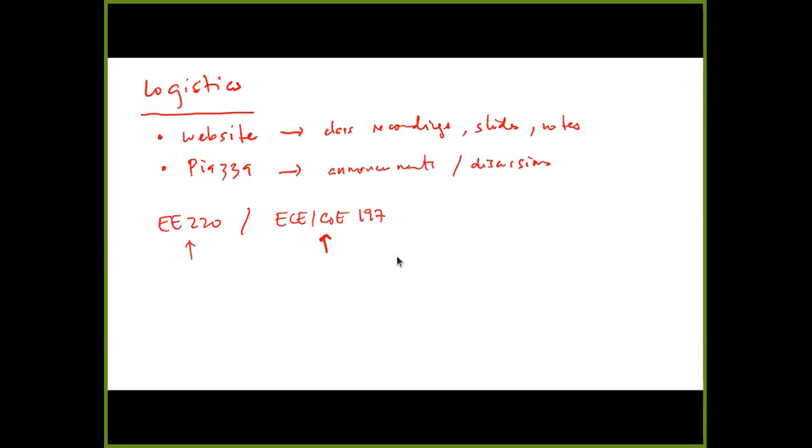So this is cross-listed as EE220, and for UP students, ECE COE 197, right? So that means grad students are taking EE220 while undergrads are taking the 197. The lectures are pretty much going to be the same, but for grad students, you get additional work, right? So for those enrolled in the grad course, you get additional work, a bit more, not really that much, but you do get some more requirements than the undergrads.

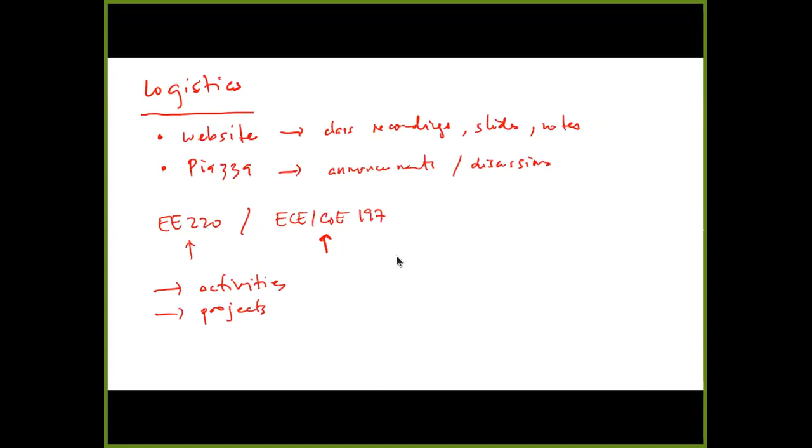And so in this particular case, grading for UP students will be, we're going to have the activities, and then our projects. But again, the undergrads and grads will have slightly different requirements. Okay? So I sort of was referring to UP because this is again part of the CIDR, the Center for Integrated Circuits and Devices Research.

And one of the components of this is a DOST funded project. And one of the components of CIDR is to try to promote IC design, right? To schools, companies, and so on. So this class is actually a first because we have not only people from UP, but from various universities, companies, and some government institutions, right?

So right now we have 68 attendees, I think. So we have space for more, right? So the limit for this particular Zoom thing is something like 500. So if you know someone or a classmate was not able to attend now, they definitely are welcome to attend in the future. Okay, so again, as you probably saw, registering to the Zoom links.

So the Zoom lectures are going to be 7 to 8:30 a.m. Mondays and Tuesdays. But you have to register so that we sort of can keep track of all of these things. We have to report to the DOST at some point. But it's also good record keeping. So if you have not, I guess you're here, so you've registered. But if you have classmates or someone else that want to attend, they have to register first. You have to just register once to get that link, and then that's good for the whole semester.

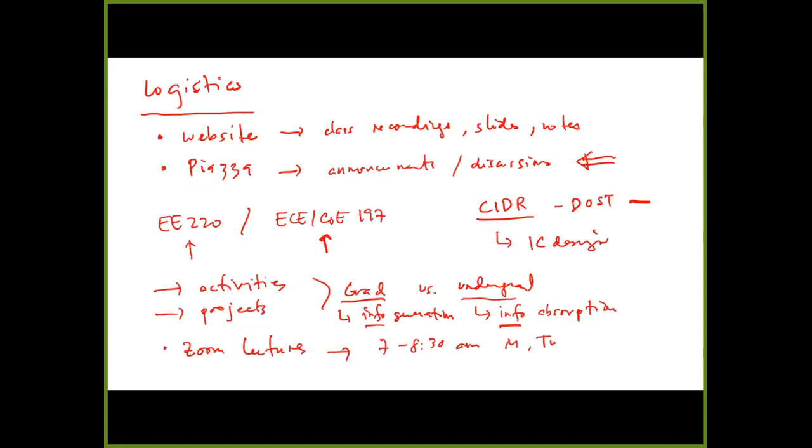Okay. So first of all, what I want to talk about, this is EE220, and the title is Analog Integrated Circuits. Right. So let's just try and figure out the scope of this. So first of all, let's try to define what analog is. A lot of times, or at least for the purposes of this class, when we say analog, we mean continuous quantities in either voltage, current, charge, flux, and so on and so forth. Right? And analog is actually divided into, so hopefully we understand, right?

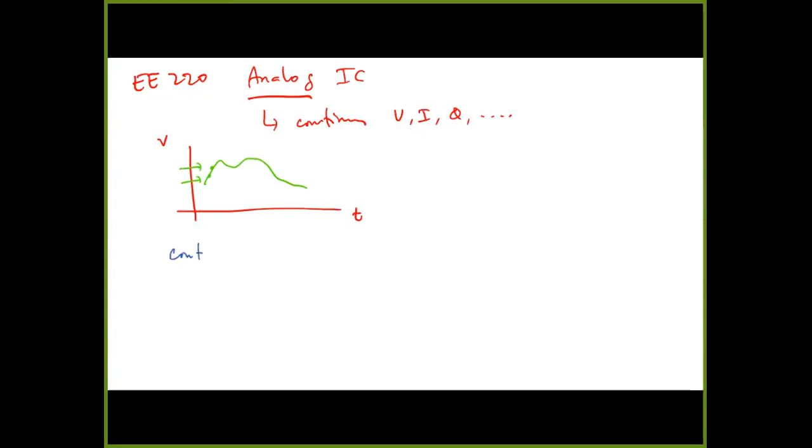So that means if you have over time some voltage or current or some waveform, this thing is continuous, right? It exists for every point in voltage. Right? But it turns out that that is true for two additional classes, right? One, we have what we call continuous time. That means the voltage is defined at all points in time. So this is continuous and this is continuous. That's what we mean by analog continuous time.

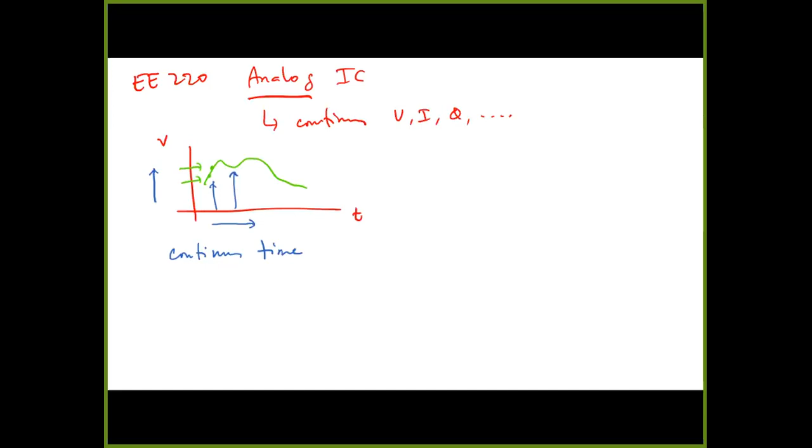But in this class, we will also look at discrete time. That means it's still going to be continuous in voltage, current, charge, and whatever, but it's going to be only valid at certain points in time, right? So maybe it's only valid at this point, this point, and this point. So you have, let's say T1, T2, T3, right? So that's still considered analog, and it turns out we like that particular regime because it allows us a lot of optimizations, especially if your analog system eventually goes to an A to D and you convert it to digital, right?

So just to illustrate that, if you have your analog input, let's say your analog signal, most of the stuff that we'll talk about will be analog processing, right? The simplest analog processing that you can look at is an amplifier. But you can think of other analog processing. You can filter, you can mix, you can up convert, down convert, you can multiply, and so on. Or you can change the frequency response. You can shift frequencies from one to the other. So it is in continuous time.

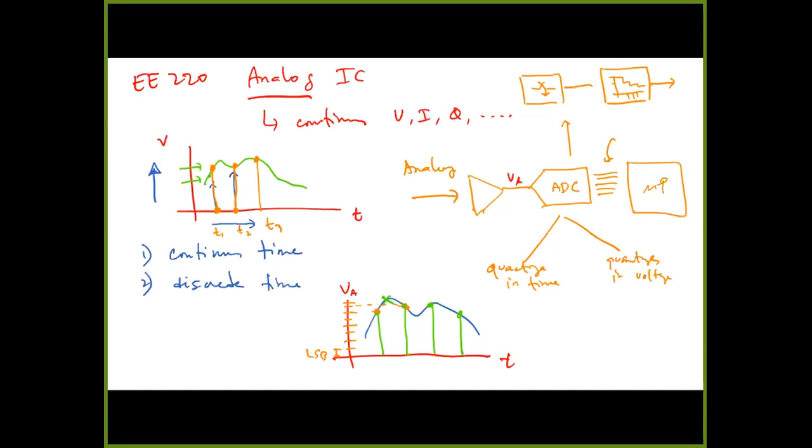But it turns out these two components can actually be separated. That means I can think of this ADC as just a switch that samples in time, and a quantizer, something that, for every input, gives only certain levels at the output. So in this setup, this is continuous time analog, this is discrete time analog, and this is going to be digital.

So when we talk about quote unquote analog versus digital, the boundary is sort of somewhere here. And by thinking of it this way, we actually have a lot of opportunities to optimize. For example, if I have an amplifier or a filter up here, and I know my ADC will just throw away this part of the waveform, I'd rather not spend power or effort trying to amplify or filter that.

So what people do is, instead of putting the processing here, you put the processing after the sampling, let's say the amplifier, and you come up with discrete time analog circuits. One very common class of discrete time analog circuits are switched capacitor circuits, which we'll also look at, because they offer a lot of opportunities to save on energy and power. So when we talk about analog, we're talking about these two things: continuous time and discrete time.

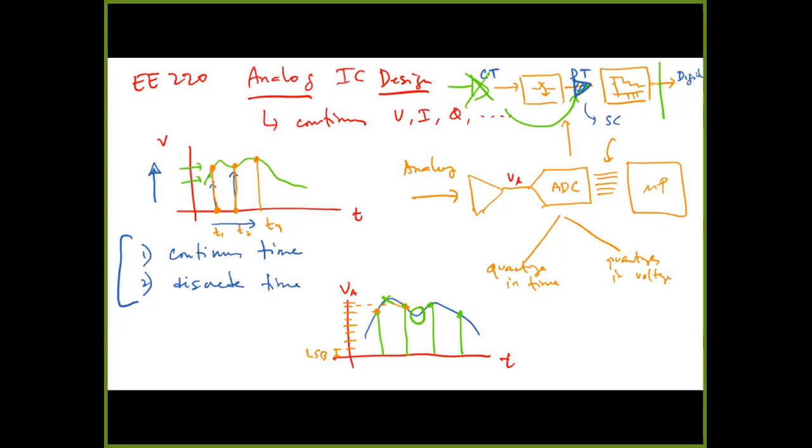Okay. Now, one of the things that we want to also understand about 220 is, of course, this is analog IC design. So let's talk about that for a bit. Am I running out of slides? Yes. So when we say design, let's talk about this.

So what is design? Well, for us in analog, design is a process where we start with specifications. Then from there, we figure out our circuit topology, everything about the circuit. And then maybe you do layout, and then you implement that particular circuit.

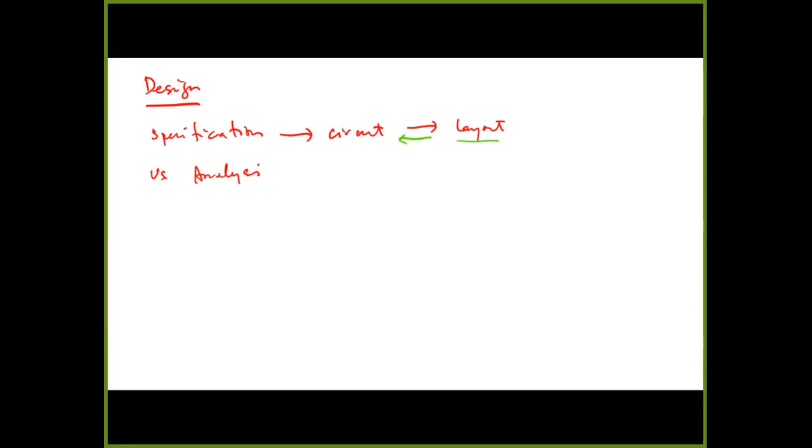Just to distinguish it from analysis: analysis is exactly the opposite. When you do analysis, most of the time I start with layout and I try to figure out what that circuit does and the performance of the circuit. In most undergrad classes, you start out with the analysis part. You're given a circuit and you try to figure out how it works.

But in design, it's totally different. I need something that works like this. What's the best possible circuit that we can have? And one thing that we want to understand here is when we design, the specifications normally would give you functionality.

Okay? But in real world applications, functionality or basic or fundamental functionality is the easiest thing to achieve because you have a bunch of other metrics that you need to meet, and we'll talk about that when we get to our design. But just to illustrate, okay, maybe it has to work over a wider temperature range, or the noise should be less than a certain amount, or the offset should be within a certain range, or the power is below a certain limit, right?

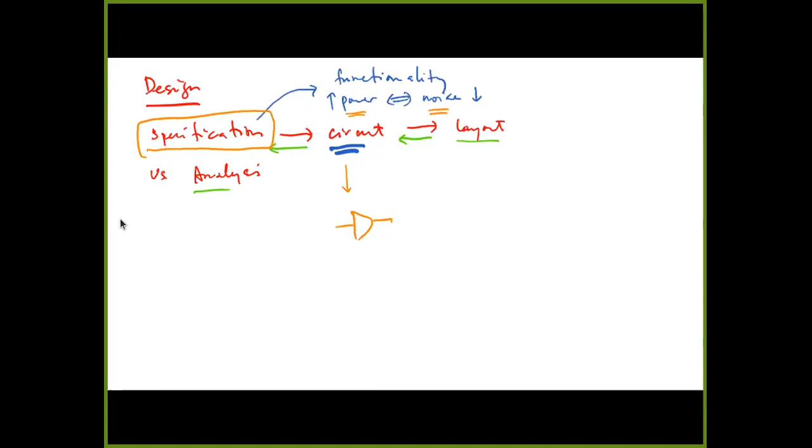Oh, what is that? So there's something blocking the screen. Let's see if I can. How do I do it? Does that work? Oh, okay. How is that? Hopefully, got it now. Oh, it's still there. Let's see. Now, okay, good. So it turns out that if you have a bunch of windows open, even if your shared screen is in front, screens at the back can actually block the view.

Okay, good. Thanks. So we're talking about all these specs, and in some cases the technology and the application can make it easier to meet certain specs than others. And when we say easy, that means the cost is going to be lower. And when we talk about costs, it's not monetary cost most of the time. We'll see that we have different currencies in our design, and the most common currency in analog design is gain, right?

So if I have an amplifier with a lot of gain, I can use some of that gain to buy something else, right? So I can use gain to, let's say, buy bandwidth. I can use gain to buy better input and output impedances. I can use gain to get lower noise. When I say buy, that means if I reduce gain, or trade off gain, I can increase bandwidth, I can improve impedances, I can improve noise, and so on and so forth.

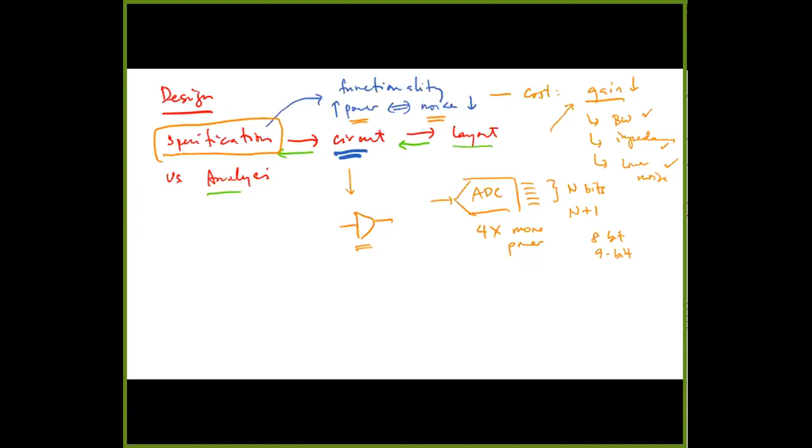Right? So a lot of times you get ad hoc type design methodologies, but that does not scale, especially when your circuits become very complex, and you get multiple specifications or metrics trading off, right? So we made an example of power and noise, but it's actually a more complex trade-off scheme, right? Power, noise, bandwidth, gain, and so on and so forth, linearity.

So you want a systematic approach, but you want it to be based on fundamental principles. So fundamental, easy to verify principles, right? And by doing that, we can create approaches or methodologies for not only one specific thing, but for a wide variety of applications.

Okay, so again, let me know. My handwriting is definitely very bad. So let me know if there's something you cannot understand on that screen. Right?

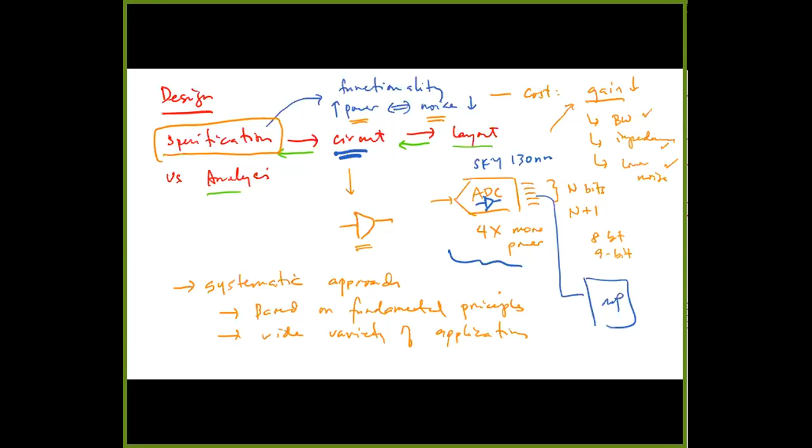Right? In digital, it's very straightforward, right? So if I build gates, I build a microprocessor and stuff like that, I have something like 1 million gates. So how much is the cost of a gate? Or that translates to, what's the cost of a transistor? And the reason why we started to move a lot more things into digital is the cost per transistor is going down exponentially.

Okay? Now, this is, if I'm not mistaken, a 2006 figure from Intel that is very optimistic. They were somewhere around the 22 nanometer type thing, or 30, when they drew up this slide, and said, yeah, this looks pretty neat. So what does this mean? If you do the slope here, cost per function decreases 29% per year. Cost per function is a metric the digital people use. It goes down around 29% per year.

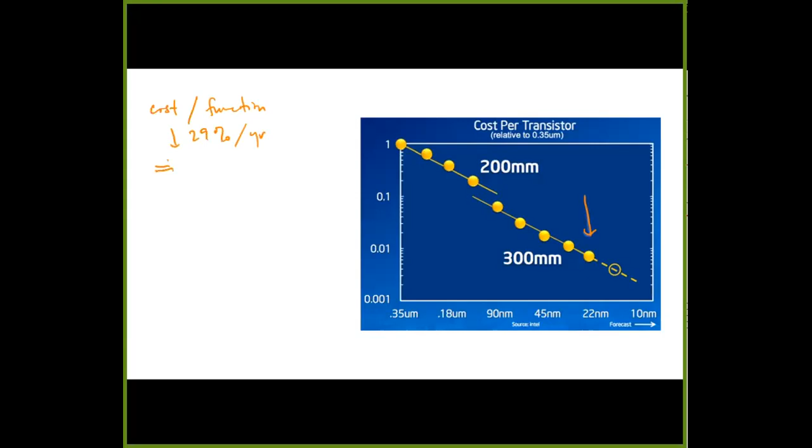So people have already done these numbers. The implication here is the cost goes down by 30x in 10 years. Whatever I'm paying now in terms of fabrication and so on, in 10 years it goes down 30x. So this is also one reason why we try to avoid competing in cost. Why? Because Intel, if they do nothing but just scale, if they have one circuit design from something like 2000 and do nothing except build new fabs that can manufacture those designs, their cost is going to go down 30x in 10 years.

So if you want to compete with them, your circuits have to be better. In terms of cost, your projection should be better than 30x in 10 years, something like 100x or 300x reduction, because they will get 30x doing nothing in terms of circuit design. And if they add circuit design, they can get something like 100x or more reduction in 10 years. So it's cost per function. You're paying the same amount for a processor, but you have more functions in your processor; they can pack in a lot more functions.

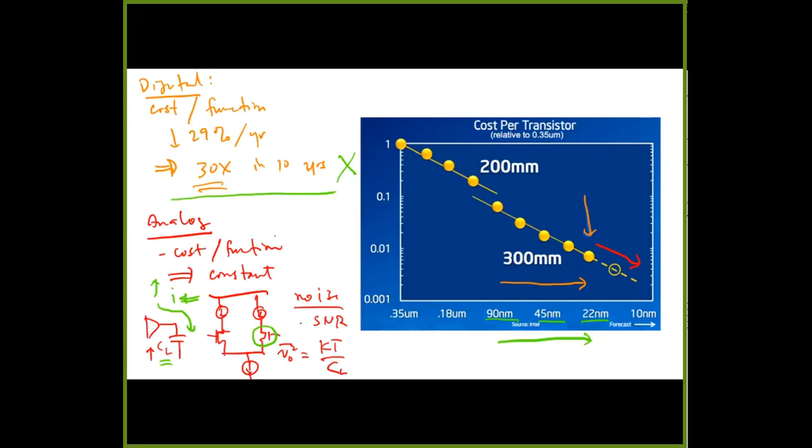When you go from 90 to 45 to 22, your clean rooms have to be better, your lithography has to be better, and so on. But that's factored in these curves. So what changed when we started going below 28 nanometers? Let's see how we normally progress and how people think about transistors, in our normal planar device.

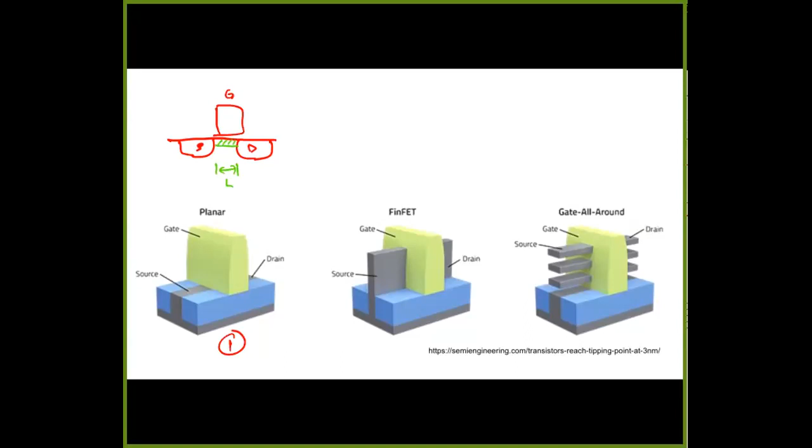So we have our planar device, figure 1. If I look at the cross section, you get that very familiar source, drain, and gate. The gate produces an electric field that generates a channel there. One interesting thing is that the current depends on the transistor length. The smaller the length, the larger your on current, which is good, because to get speed with a very large CL, since you want low noise, I need a lot of current.

So I get faster and faster devices, right? But that's good because when you start reducing the length, the current starts going up. Okay. Now, the problem is when that length becomes very small, it becomes harder and harder to turn the transistor off. So that means even if I turn the transistor off, just because the source and drain are very close together, current can still flow, right?

And you have a bunch of mechanisms there. One is leakage current, another is what we call sub-channel conduction. Ideally, you want all the current to flow next to that surface, but because they're so close together, you get conduction below that channel, right? So you can get leakage through there, or you can have breakdown. Just because these things are very, very small, something on the order of sub 10 nanometers, right?

So the issue here is, I can actually make that current very large, but I lose control of the current, right? Because I can try to turn off the gate or change the gate voltage, but it's not affecting the current that much anymore. So how do you move forward? Well, there's a bunch of ways, and one of the more common, for 28, 22 nanometer type devices, are what we call FinFETs.

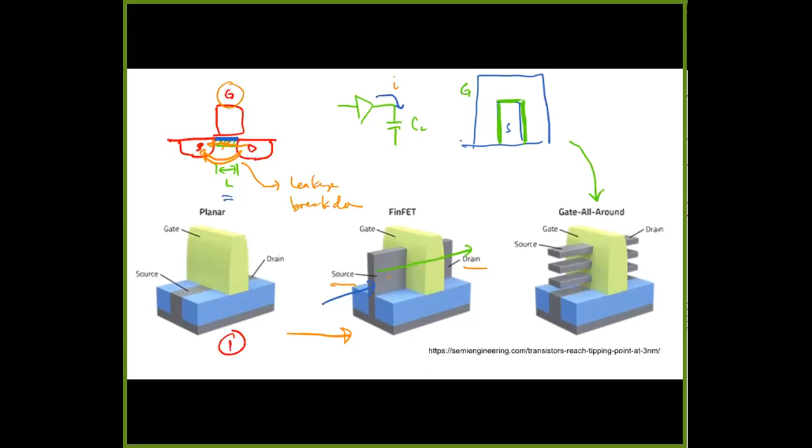So what does that mean? The gate controls three sides of that source, right? So it allows me to control the current coming in way better. And obviously the trend now, people are really excited about: if I can do that FinFET, I can extend that to what we call gate all around.

So now looking at the source in this direction, I have the source and the gate going all around, so the gate actually controls four sides of that source, right? So it controls the whole channel. Over here it's controlling this, this, and this. So you actually have less chance of leakage and breakdown. I can start increasing the current, but at the same time maintain control of the current.

And obviously, if I can do that for three sides, I can do that for four sides. I can control all that channel region over there. So it allows me to again do scaling, increase that current while reducing this leakage. This is something called the I-on to I-off ratio. This is a metric for how they design transistors. I want to be able to have a lot of current, but I also want to be able to turn it off.

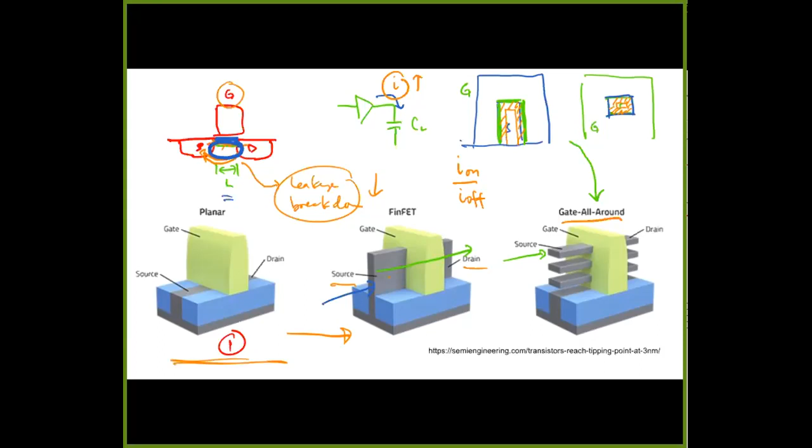And it turns out that our planar traditional transistors have very bad I-on to I-off ratios. When you get to 28 nanometers, Intel has a nice 22 nanometer FinFET, TSMC also has a nice 28 nanometer FinFET, and you get significantly better at this. But notice that, yes, I can design smaller and smaller transistors. Samsung said this: we can design 3-4 nanometer transistors, but we cannot make them as cheap as something larger than 28 nanometers, because the lithography and manufacturing you need to build this is way different.

So this is something we want to understand. And having understood how this works, we want an analog design methodology that can scale, right? What we want now is something we can use to design analog circuits in planar, in FinFETs, or later on in gate-all-around. So the methodologies that we look at are going to be still applicable.

That's what we want. We want to have them applicable to all of these, so we're prepared when we start changing technologies, right? So the good news is that what we want to do in this class is going to be agnostic of technology. In any of these things, we look at fundamentals and design with that in mind.

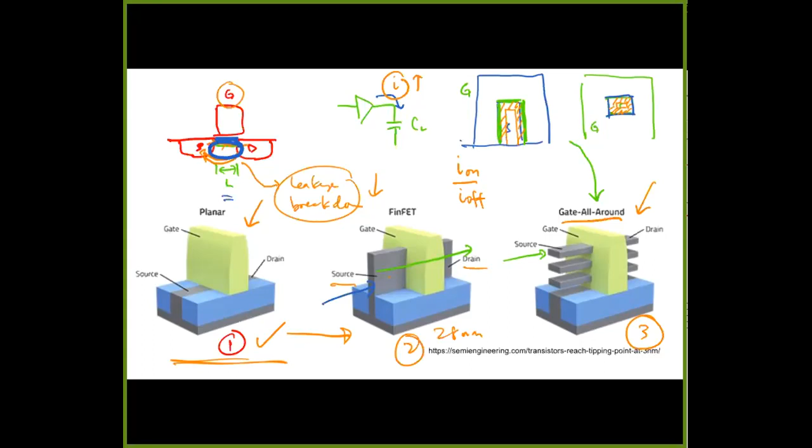One other limitation on why analog circuits cannot scale as much as digital is, again, it has to do with signal to noise ratio and how digital scales. So a lot of these fabrication facilities, a lot of the fabs, are optimized for digital. Okay? So what does that mean? When you're optimized for digital, I want to be able to optimize inverters, right?

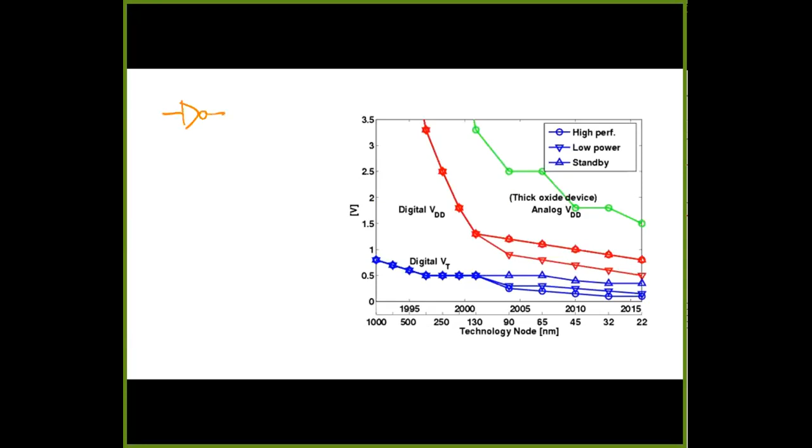So when you're a digital designer, I think for the most part you can reduce everything to the performance of an inverter, right? And one of the things that we sort of notice is that the power is proportional to the load capacitance times supply voltage squared, right? So if you want to reduce the energy, or power, you definitely want to reduce VDD times switching frequency.

So the good news about digital is that the noise margins are very large, right? It's a 0 or 1, or 0 or VDD, such that there's a very large margin there. So for digital, I can just go on and reduce supply voltage because I only am representing 1 bit, right? So that's the trend you see here.

Supply voltages went down drastically from the 1990s to just short of that 90 nanometer node. And one of the reasons why is I really want to reduce power. Why is that? Because the main limitation for all our digital stuff is power. Our processors running at a few gigahertz consume a lot of power.

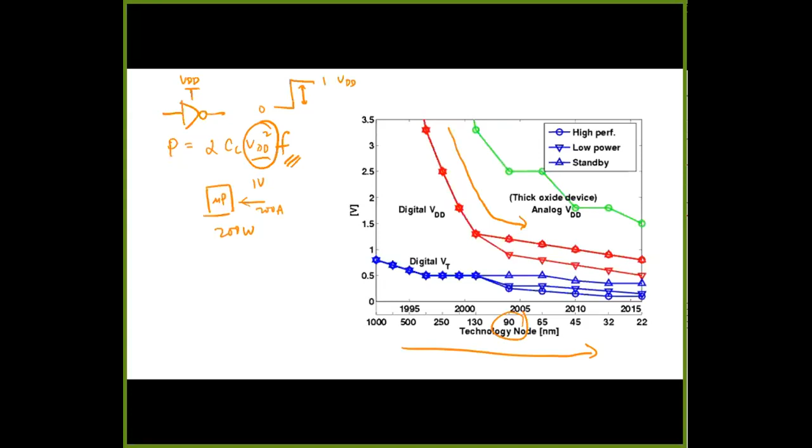This is a very powerful knob in digital. It's VDD squared, so reducing it by a small amount, I get large benefits in terms of power. However, this also allowed us to have smaller and smaller gate oxides. So if I have a transistor, with source, drain, and gate, I want to be able to scale everything.

If I want to scale my horizontal dimensions, it turns out I also have to scale my vertical dimension. This is my oxide thickness, and in a lot of the advanced technologies it is measured in angstroms. Fun fact: at something like the 45 nanometer node, the thickness of that oxide, pre-high K, is around 10 angstroms. And this is when they were using silicon dioxide.

But the problem is the diameter of a silicon dioxide molecule is in the order of 3 angstroms. So you're actually talking about 3 atomic layers of silicon dioxide separating the gate from the source. That means you cannot put very high voltages on the gate, so when you scale, you have to scale down the supplies. But something happened. Something allowed us to maintain the voltage here.

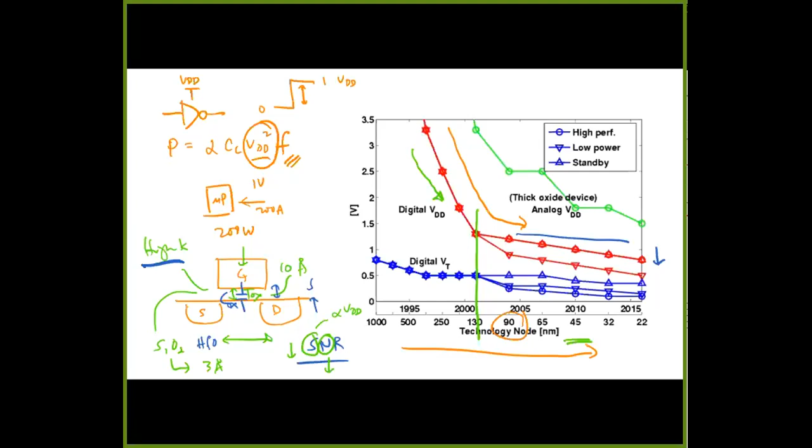And just to illustrate that, this is a nice little picture from Rutenbar at CMU. It shows a few things, right? One is that the drive of technology is to bring down supply voltage because you get a lot of benefits in terms of digital. And in digital, because it's 0 to 1, there's a lot of noise margin.

However, in analog, you're actually packing in a lot of bits in a waveform, right? So you get 0 to VDD. If you have, let's say, an 8-bit A to D later on, then I'm actually packing 8 bits there, right? Or 3 bits in this case, and then 8 bits.

So that means I need to have a resolution of VDD over 2 to the number of bits. So I have to be accurate when you do analog processing. If this goes into an 8-bit thing, then I have to be accurate to VDD over 256. It's even worse if I have a 10-bit A to D after, or I need 10-bit resolution after processing, and that means VDD over 2 to the 10 is VDD over 1024. So when you reduce this, you still need this much accuracy, right?

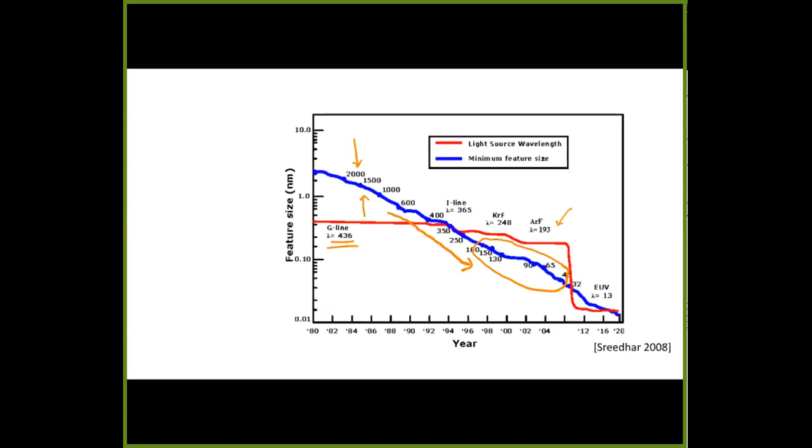But the problem is getting light sources to follow the minimum feature size turns out to be very hard. So at some point you cross over. You want to start building transistors smaller than the wavelength of your light source, right? Which is ridiculous, right? So as you can see here, all of these things, 130, 90, 65, 45, they're built using light sources with longer wavelengths than your device dimensions.

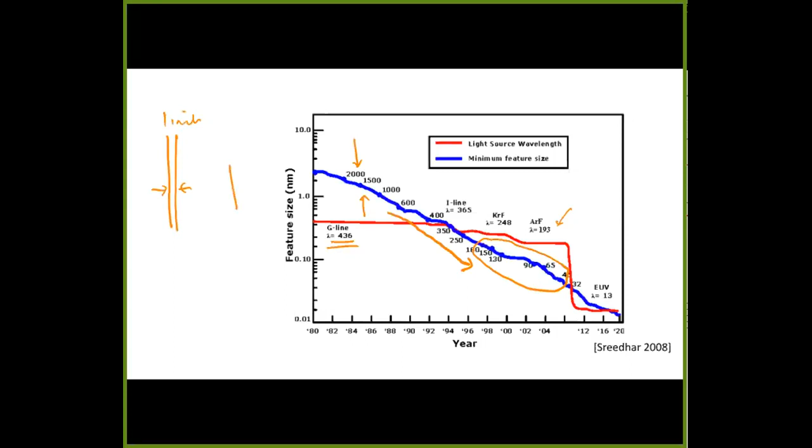So what does that mean? It looks like you're trying to paint a very thin line, let's say a 1-inch line, with a brush that is something like 4 inches wide. How do you actually do that? So this is where a lot of the fancy developments in lithography happen, right? Because we've done this, and these things work. We can build 90 nanometer devices with light sources at 193 nanometers, and we do that very well.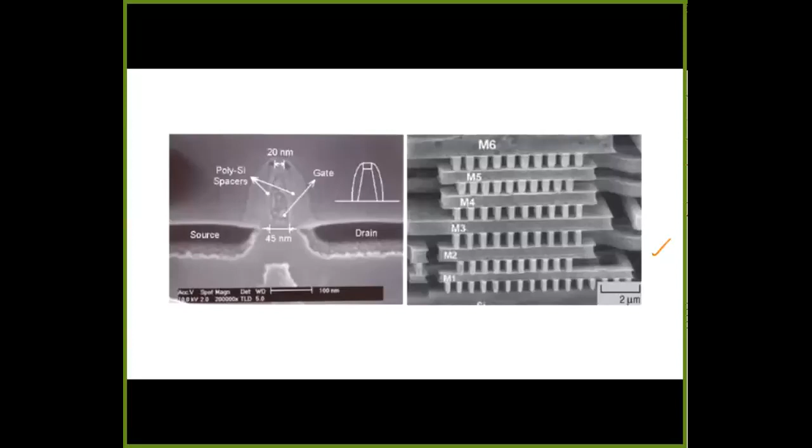And the way they do that is what they call optical proximity correction. You pre-distort the mask, because if you just do a straightforward pattern on the mask, since you're trying to paint that 1-inch line with a 4-inch brush, you get very bad results. However, if you do proximity correction, basically ray tracing and optical computation, which involves a lot of computation, then you pre-distort that mask so you can actually get the line that you want.

Now, this comes in several flavors. You either just correct the mask, or in some cases you correct the mask and do second exposures, and you take advantage of constructive or destructive interference of the light. But ultimately, because of the way we do this, we get a lot of variations. We cannot build a lot of these things exactly the same way.

And at the same time, if you have a wafer, a lot of times the light source is a point source. So the light goes this way and this way, and it passes through your mask. So in some portions of the wafer, light actually travels at an angle, and in some portions light travels directly vertically, and anything in between, you have different angles where the light hits. So you have very small variations in this.